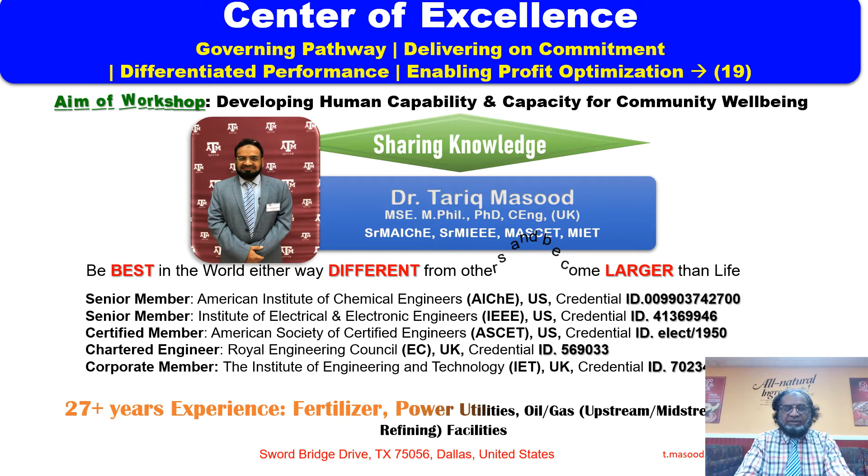Today I am going to discuss Center of Excellence, lecture number 19, SIL Study Guidelines, section number 3.

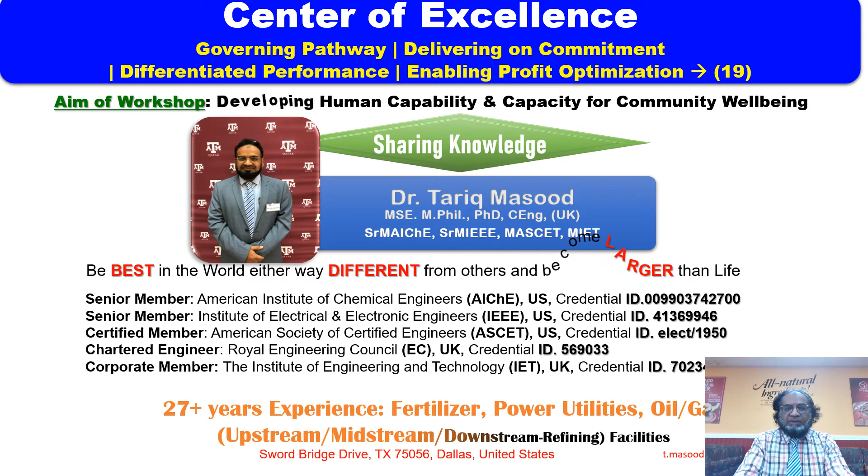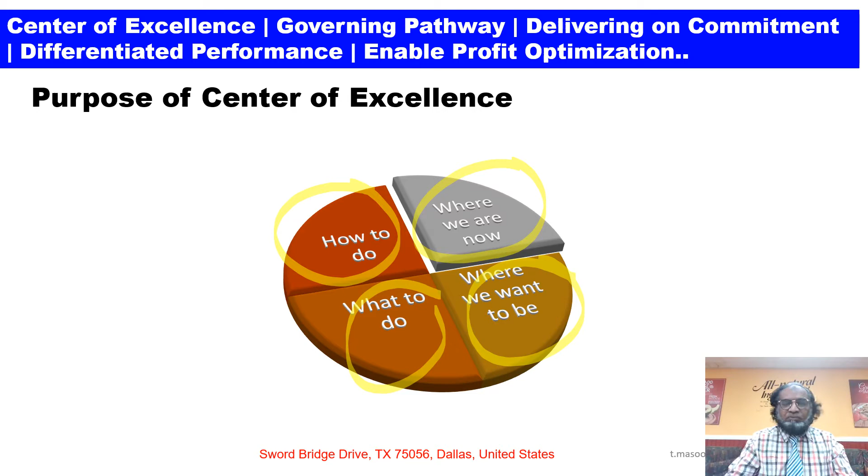Allahumma zidni ilma. Okay. Center of Excellence, lecture number 19 and SIL Study Guideline. Okay, purpose of Center of Excellence: where we are at the moment, where we want to be, what to do and how to do it to achieve the goal. So we are still working on SIL, Safety Integrity Level Assessment, section number 3, Safety Integrity Level.

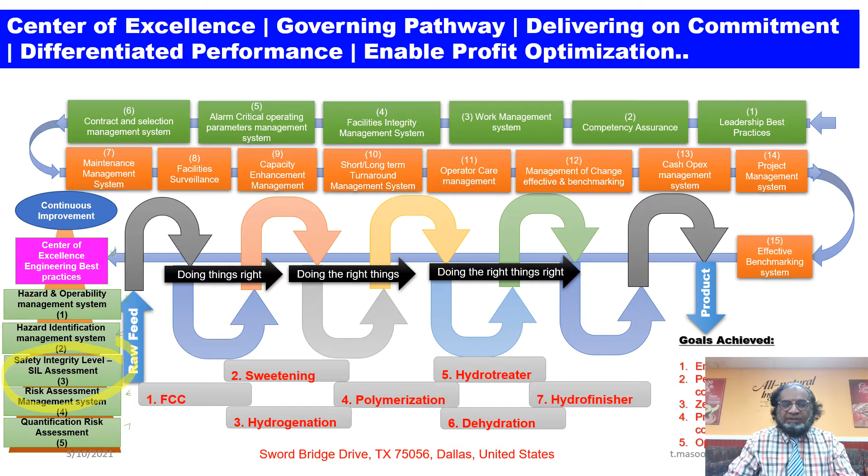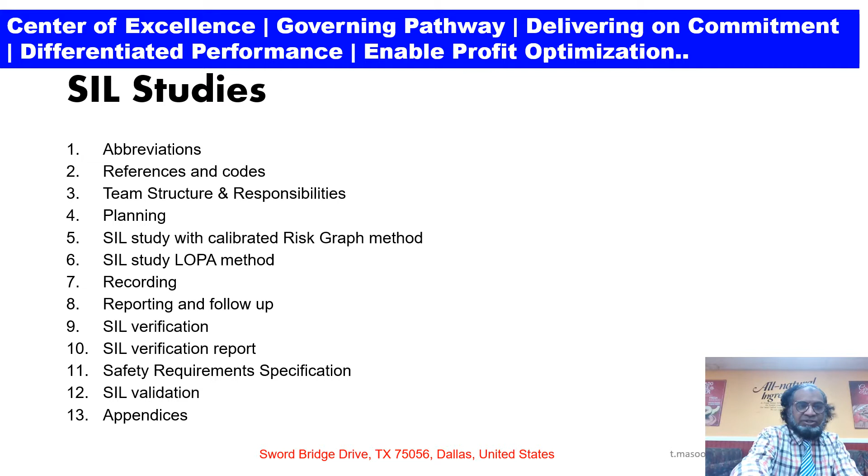Key takeaway points from lecture number 19, SIL Study Guidelines. First, we are going to discuss the scope, then policy, and then SIL Study Calibrated Risk Graph. Okay, forward message as we have discussed earlier in my lecture number 1. SIL study: we have discussed abbreviations, reference codes, team members, planning.

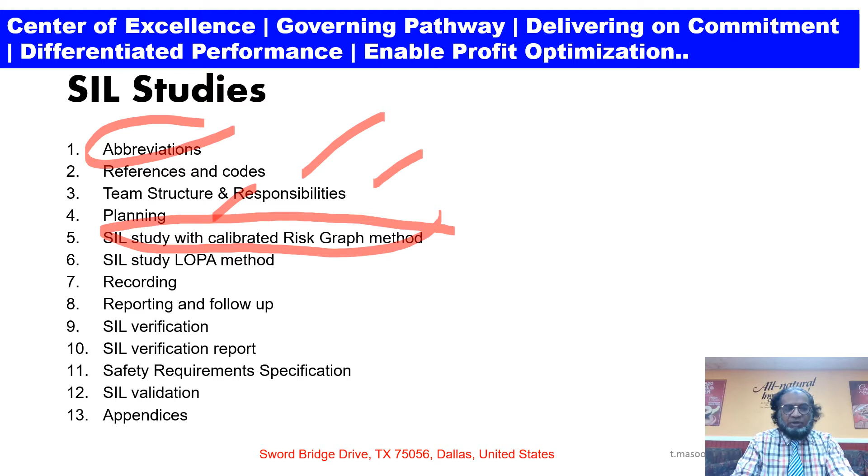So today we are going to discuss SIL study calibrated risk graph methods. At a later stage, we will discuss SIL study LOPA methods, recording, reporting and follow-up, SIL verification report, safety requirement specification, SIL validation and appendices.

Okay, introduction, safety integrity level. The study is an analysis which aims at determination of the appropriate reliability required from the elements of the safety instrumented functions identified in prior safety studies, that is HAZOP. The approach of this guideline is to remove the uncertainty regarding the safety integrity level, cost effectiveness and availability requirements, reducing over and under engineering in a traceable manner.

The SIL study is a method to record all SIFs for the project development and document the expected reliability level. SIL study provides a basis for future maintenance and operating strategies. SIL study shall be conducted during FEED phase and EPC phase in accordance with the engineering health and safety plan as required by the outcome of safety studies of the project.

SIL assignment is based on the amount of risk reduction that is necessary to mitigate the risk associated with the process to a tolerable level. All the safety instrumented system SIS design, operation and maintenance choices must then be verified against the SIL assigned.

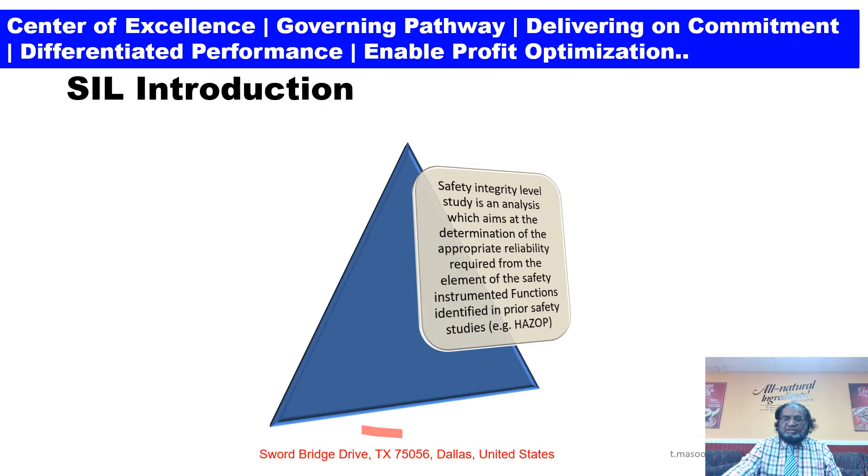Okay, the next, scope. The guideline details the structures, responsibilities and techniques of the safety integrity level SIL studies: calibrated risk graph and LOPA methods. However, SIL levels assigned 3 and above using risk graph methods shall be further verified. LOPA methods can also be used when the SIL assessment team using a risk graph method is unable to reach a consensus agreement on target SIL levels. The guidance also details the requirements for the safety requirement specification, SIL verification and SIL validation for a project.

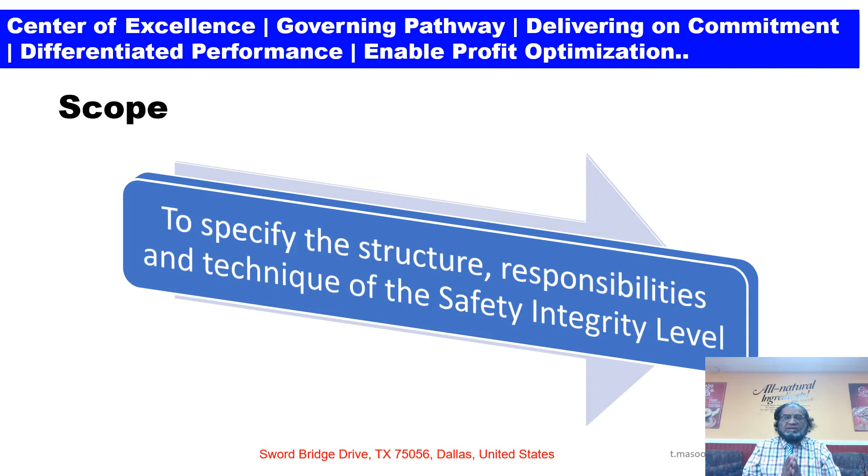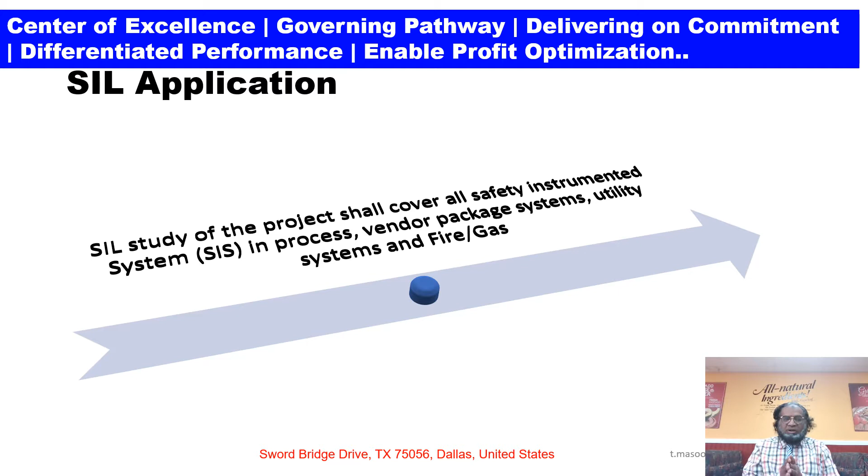Okay, application of SIL. SIL study of the project shall cover all safety instrumented systems SIS in the process, vendor package systems, utility systems and fire and gas systems associated with the ESD system where there is a potential for hazard to human safety, environment or asset production losses as well.

Next is the policy. In the SIL study, the oil and gas companies are committed to protect the health and safety of the employees and others that may be affected by their activity and give proper regard to the conservation of the environment. So, company policy is to conduct its activities such that it strives toward an incident-free, secure, safe, and healthy workplace. Safety studies and reviews shall be performed during the course of the project or modification to existing facilities.

This is to identify, quantify, and establish the design safety measures that provide adequate protection to mitigate any risk involved with the proposed project development or the modification process.

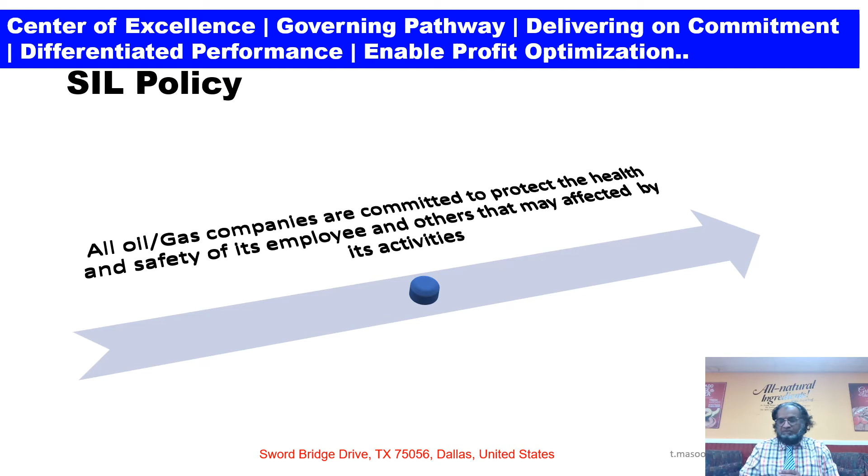Okay, reference standards and codes. International references: IEC 61508, Part 1 discusses general requirements, Part 2 electrical/electronic/programmable electronic safety-related systems, Part 3 software requirements, Part 4 definitions and abbreviations, Part 5 examples of methods for the determination, Part 6 guidelines for the application of 61508-2, and overview of techniques and measures is discussed in Part 7 of 61508.

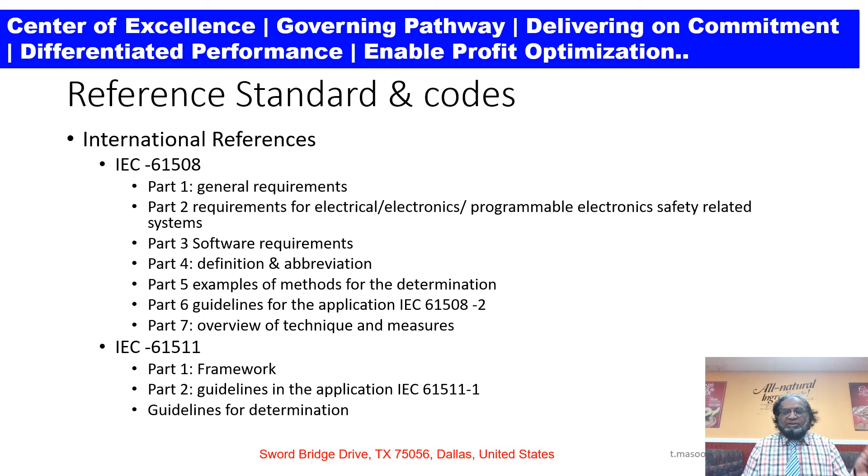Similarly, IEC 61511, Part 1 discusses the framework, Part 2 guidelines in the application, and guidelines for the determination are discussed in the references and standards. We have also discussed these in my lecture numbers 1 and 2 and sections of operational excellence 17 and 18. SIL study with calibrated risk graph.

We have also discussed in my earlier slide the standard IEC 61511, IEC 61508 Clause 6, IEC 61511-3 Annex D, and ALARP, as low as reasonably practicable. So we are going to brief today about all these standards and how they are linked to each other in order to deliver the SIL study.

Okay. The technical standard IEC 61511 sets out good practice for engineering of the safety instrumented system that ensures the safety of the process industries. This standard defines the functional safety requirements established by IEC 61508 in process industry sector terminology. The IEC 61511 covers the design and management requirements for SIS.

Its scope includes initial concept, design, implementation, operations, and maintenance through decommissioning. The standard starts in the earliest phase of the project and continues through startup. It contains sections that cover modifications that come along later, along with maintenance activities and eventual decommissioning activities. The standard consists of three parts, as we are going to discuss at a later stage in class number 6.

The SIL study session is a guided team brainstorming activity that benefits from a structured method and from the broad experience of a multidisciplinary team led by a SIL facilitator. The methodology that will be employed for SIL determination is a technique that uses a semi-qualitative method, the calibrated risk graph, as defined in IEC 61511-3, Annex D. Later we are going to discuss Annex D as well.

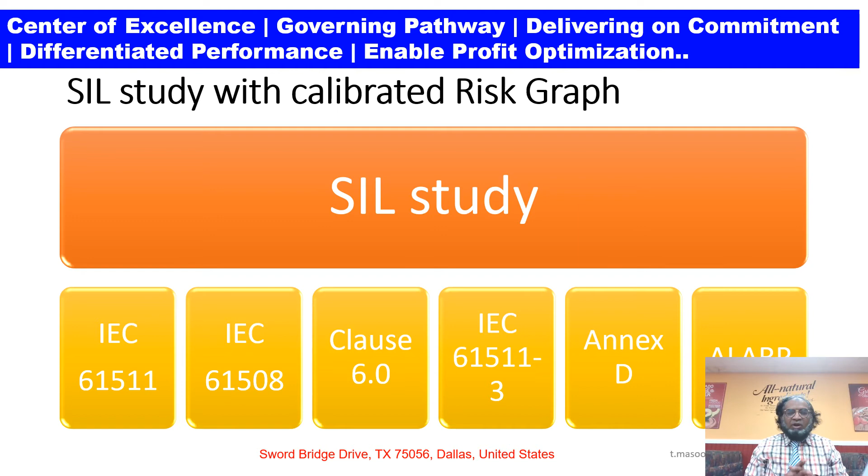On my next slide, we are going to discuss the SIL study sequence. The SIL study process shall be divided into different steps. Select the safety instrumented function number 1. Review the SIF descriptions already documented in SIL study worksheets by instrument engineers. Review the design intent already documented on the SIL study worksheet by the process engineer. Determine all the potential causes, demand scenarios, which trigger SIF actions.

Agree the credibility of each cause, identify potential hazards in terms of consequences of SIS failure on demand: C, personal safety S, environmental effect E, economic loss A, occupancy F, probability of avoiding the hazard situation P, demand rate W. Assess the preventive, protective, and mitigation safety features. Assign a SIL based on the C, F, P, W parameters: W demand, P probability of avoiding the hazard situation, F occupancy, economic loss, environmental effect E, personal safety, and consequence.

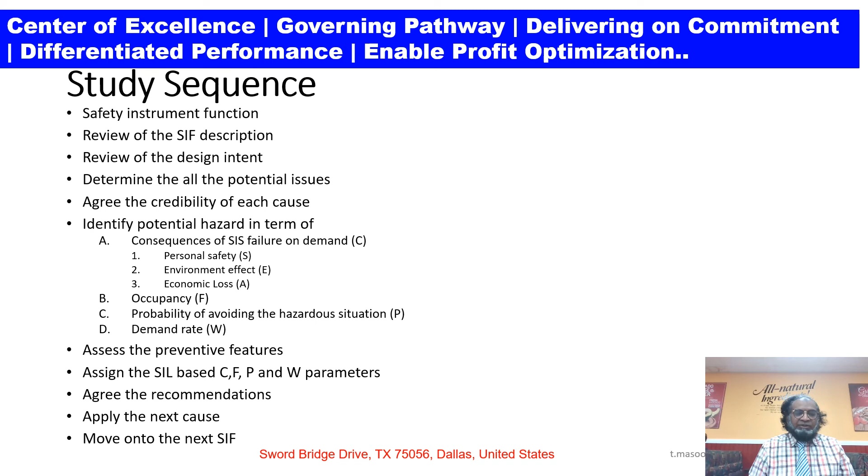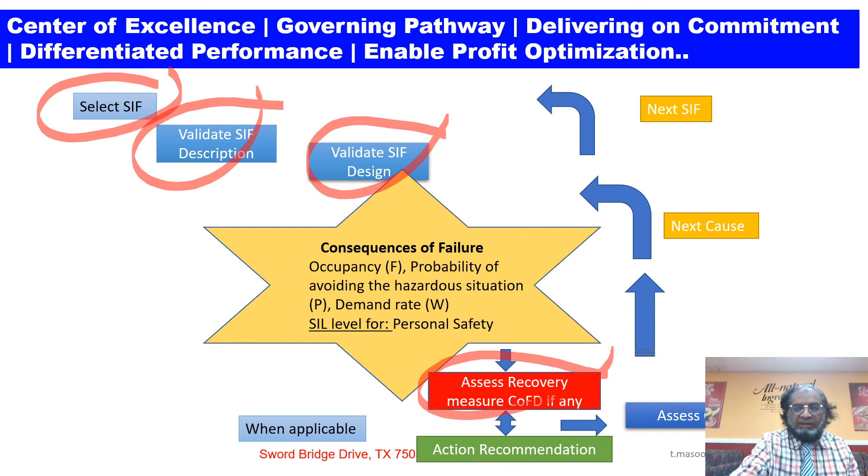Apply the next cause relevant to the selected SIF, move up to the next SIF until the whole system has been examined. On my next slide, we explain the pictorial description of the study procedure. First, select the SIF, then validate the SIF description and the SIF design. Consequence of failure, occupancy, probability of avoiding hazard situation P, demand rate W, that is the SIL level for personal safety. Then assess recovery, COFD if any, actions and recommendations, and next cause and next SIF. That whole process is applicable to determine where we are in the SIL study.

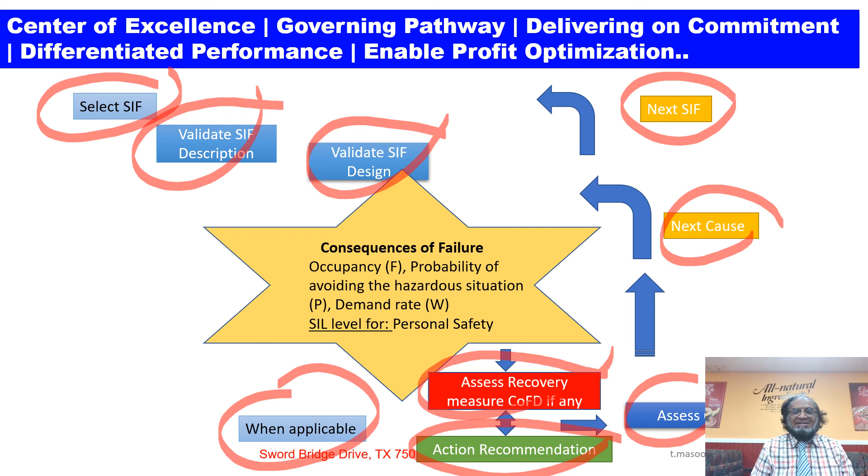SIL related documents: corporate philosophy for fire and safety, philosophy for the HSE risk management system, philosophy for health and safety activities in projects, inter-departmental procedure, engineering management of health and safety in capital projects.

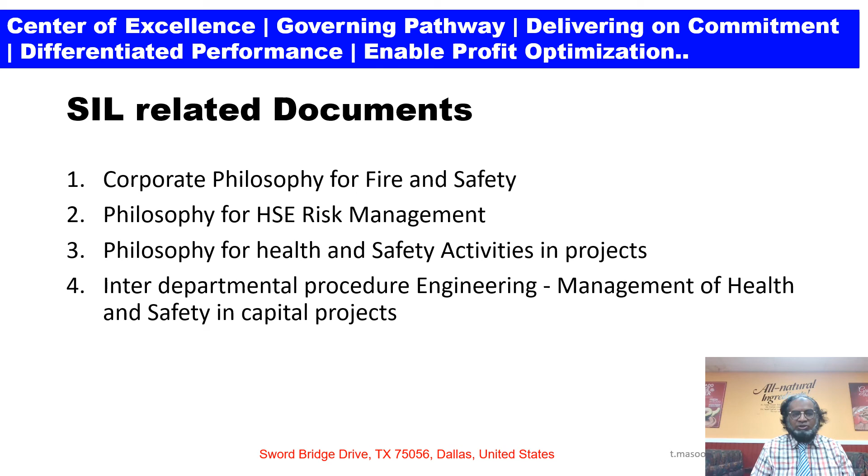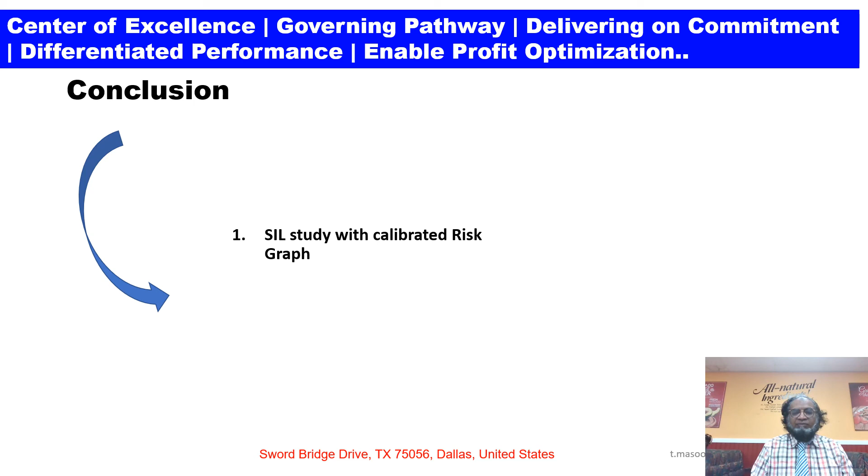Conclusion. SIL study with calibrated risk graph. We have started, and there are other steps we are going to discuss in my next couple of lectures, and then we will conclude the SIL study with calibrated risk graph. After completing the risk graph, we will discuss cause demand scenario and consequence of failure on demand, COFD.